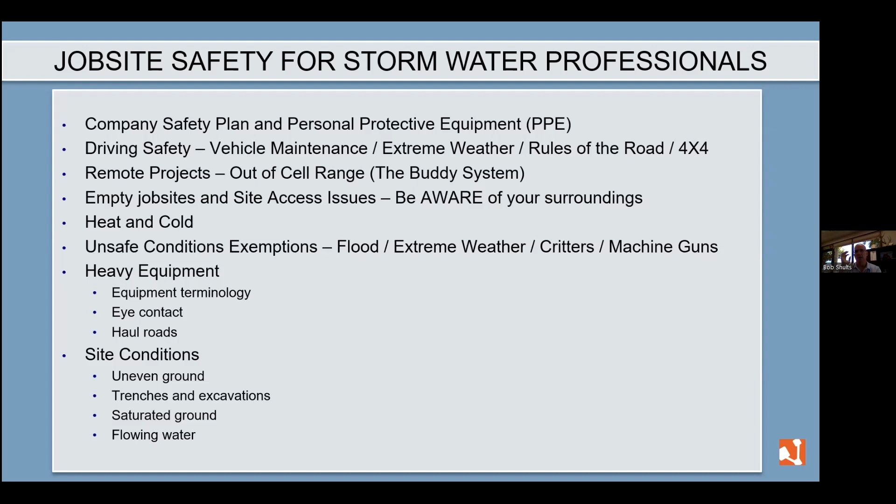So, well, I guess we could start here. We'll start here with the injury and illness prevention program. So everybody should have one of these at every project, or every company should have an IIPP. Here's an example of one, or a table of contents for one, but it's something that you should have and that you should emphasize.

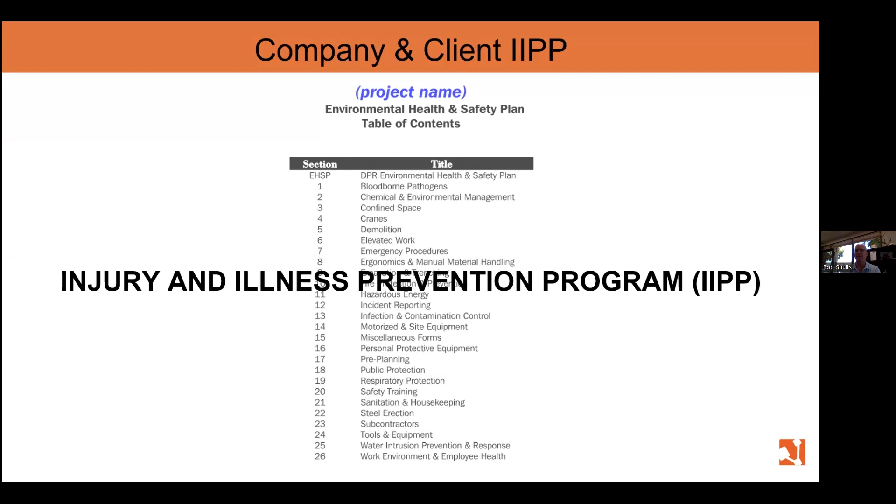So the point of having this and starting with this and starting about safety is that everyone should enjoy an injury-free environment, and everyone should live it. Live it being, I'll talk about this multiple times today, but it needs to be a part of the culture. Culture of safety needs to be something that's emphasized. You know, it's really easy to just kind of go about your business, sit in front of your desk, go out and drive to and from work and do things.

But we really want to make sure at my company, and I hope everyone would, that culture of an injury-free environment is something that we need to emphasize and live, so that people don't make risky decisions. People understand, they have that little voice in the back of their head, which should be my voice at my company saying, should I jump this trench right now? No. Bob would not be happy if he saw me jumping this trench, trying to be an athlete out here on the job site. Those are the kind of things we want.

It needs to be a culture and an understanding, and it needs to come from on high. It should not just be at a middle manager level where they worry about it and the bosses don't care. If it comes from and is clearly a priority of the higher ups, and then it goes down to everyone, it's very clear. That's the reason why we start every meeting with safety at Verux, because we want to understand that's first priority. First priority is everyone going home safe to their families at night. Okay, so it's the responsibility of managers and owners to build that culture of safety. So culture, injury-free environment, live it.

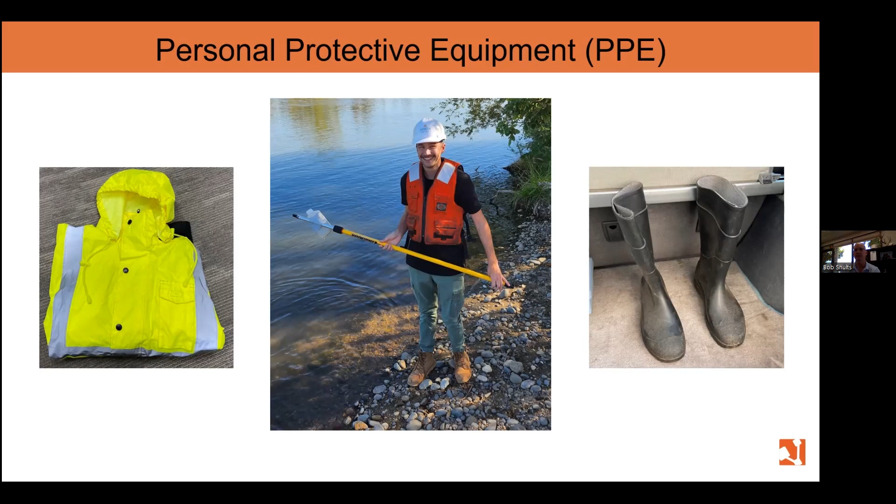All right, driving safety. As a stormwater professional, you are definitely going to put the miles in. You're going to have to drive around to those job sites, from job site to job site. So one of the highest risk things you're doing is being in that car all day long, putting 15, 20, 30,000 miles a year on your vehicle. That is a shuttle to where you're going, and it needs to be maintained and well taken care of.

So we have protocols for our people to make sure they're doing these things and they understand. A new employee may have been driving since they were 16 years old, but they had mom and dad taking care of their car, or they still don't know all about maintenance. It's very important when you're putting a lot of miles on your vehicle that you're properly maintaining it from a safety standpoint, but also for the usage and the long-term health of your car, right?

Every 6 months, chassis lubrication and wiper blades. Okay, probably more than every 6 months, definitely going into the wintertime with your wiper blades. Every 9 months, same checklist as every 3 months. Every 12 months, brakes, cabin air filter, coolant, steering, and suspension and wheel alignment.

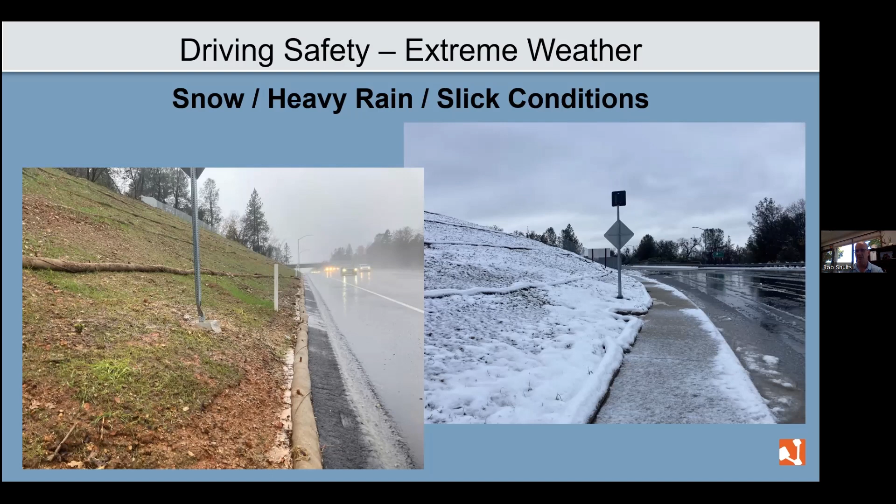Okay, speeding, passing, road rage. From a safety standpoint, speeding is not okay. Okay, you're in a hurry because you got a bunch of jobs you need to go to, but you need to drive the speed limit, follow the traffic laws. Passing needs to be done in a safe condition per the traffic laws. Road rage is not worth it.

Someone driving like a not super smart person in front of you, doing something dumb, cutting you off, those kind of things. Find some Zen, take a deep breath. It's not worth it. Don't road rage. Slow down, get away from the crazy person. And if you drive around enough, you see crazy people on the roads. Give yourself extra room when someone's weaving in and out of traffic and driving way over the speed limit. Get away from them. They're headed to a disaster. You don't want to be caught up in the crossfire. Road rage is not worth it. Don't do it.

Okay. We have a quick question, clarification. How would you suggest documentation? Photos? You're talking about the snowy conditions. Yes. And we're going to talk more about documenting unsafe conditions. We're going to get into other unsafe conditions, but from the road, yes, we always push for having a photo documentation to document an unsafe condition that you feel is exempting you from having to do your inspection.

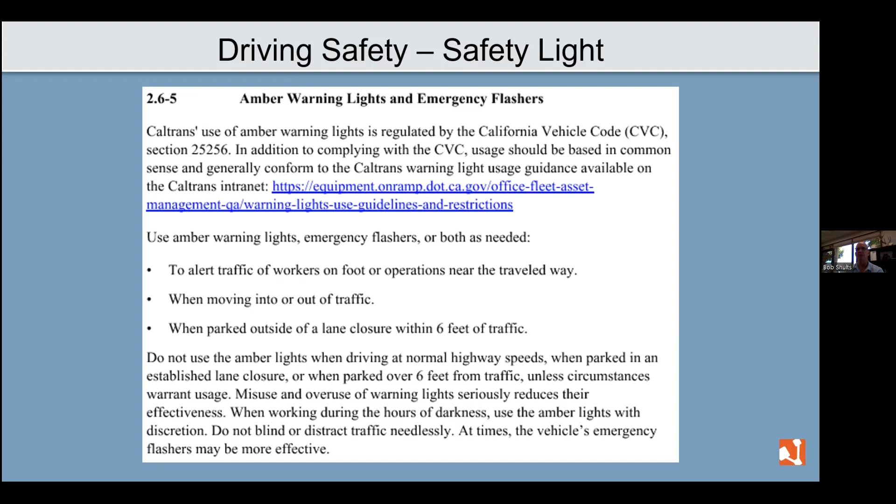So traffic control is something we're dealing with frequently on project sites. Understanding the current traffic control and communicating with your contractor client each week prior to accessing the site is really important. Having a plan for winter access during rain events, communicating the plan to stakeholders, and understanding safety concerns.

So I need to get in and out here. It may be that you can drive your car in and out of the traffic control and be able to get to the areas you need to get to. Or it may be a situation where the only safe way is to park someplace offsite and then walk the job as well.

Part of that is, on jobs you're there once a week potentially, sometimes more often during rain events. You may want to establish communication with a job that has a lot of in and out traffic, and requirements of getting in and out of live traffic. Establish communication with your contractor client about whether you need to come meet with them and have them drive you through the job in order to get through it safely.

I'm coming tomorrow - am I doing the same thing, or has traffic switched? Is there something I need to know about getting to different portions of the job site? Communication is a really important part of this. So just things to think about.

And understanding that your job's going to change - you're not there every single day. So it's going to change, and you may go out there and be unable to reach and get to all portions of the job.

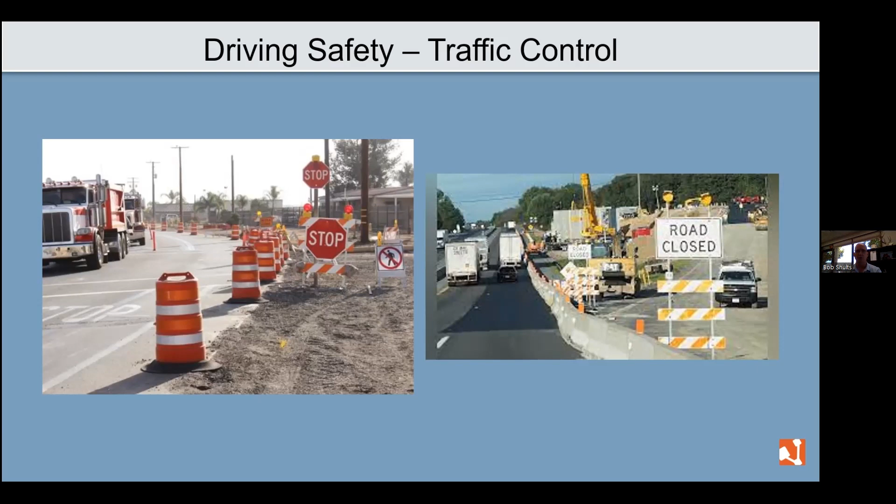As you get into winterization planning and winter planning, it becomes even more critical, because this job is going gangbusters right now, but come December, after it's rained for 3 straight weeks, it may be a ghost town, and you have to have an ability and a plan for how you're going to get around that job site. Working with your contractor client about that communication is going to be necessary.

So these are the kind of things you want to discuss and make sure you have that culture so people are comfortable discussing these kind of situations with you, and what's happening on these jobs, and then talking to your client as well.

Jobs can be empty in the wintertime because it's been raining. The contractor can't get out there, and we may not be able to get out there either. So it becomes a conversation with your client going, we can't get to the job. It's 2.5 miles on a gravel road. We're not going to walk that. So we have to figure out a way to get access to be able to do our inspections.

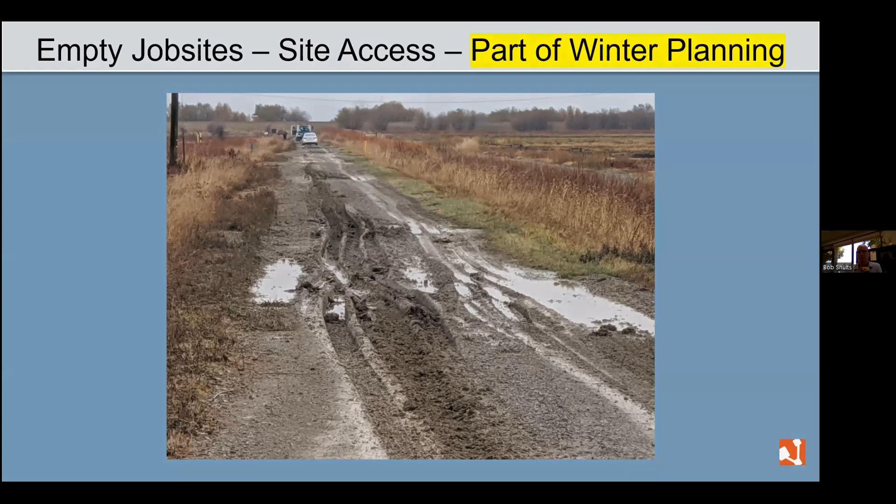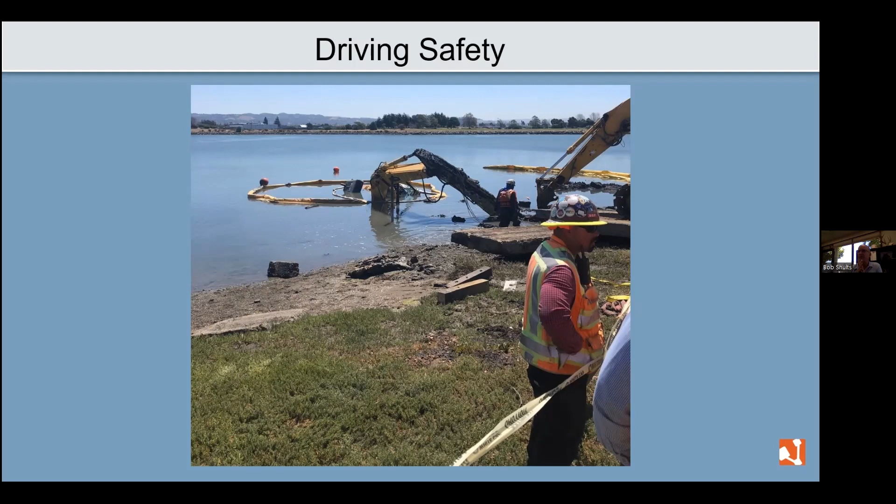This is just a funny picture. Even a contractor with very heavy duty equipment can still have things go wrong when it comes to water. This is a job with tidal influence. They had an excavator out there working, it got stuck, and the tide started coming up. Even with extra equipment there, they could not get it unstuck. Now they're spending time putting turbidity curtains around it because they have to wait for the tide to go down before they can try to pull the vehicle out the rest of the way—a sideways excavator.

Remote projects, being out of cell range, and the buddy system—it's something to think about. It's a policy that we have. It is possible to have projects that are very remote or don't have good cell service, so it's something everyone should be aware of and thinking about.

If you're going out to a project, this is a project we had at Hellhole Dam. There's not really much reason to go there, I guess you can fish, but anyway it's past Forest Hill, which is pretty deep above Auburn. It's a full 2 hours and 10 minutes of driving past Forest Hill, and from Forest Hill you have no cell service. So you've got 2 hours and 10 minutes one way to get to this project before you turn around, so you're 4 hours of driving on gravel roads just to get to the project.

And with no cell range. So when we're sending someone up there, we're obviously aware of that person being there, and we have a buddy system where we know the person's going, we know when they're going, and we know when they should be getting back. They left first thing in the morning, by 1 or 2 o'clock in the afternoon they should be back in cell range. If it's late in the day and we haven't heard anything, we're ready to send out the search party. So when you're in a situation like that, we need to make sure someone is aware of where it is you're going, that is going to be out of cell range, so that we can send help.

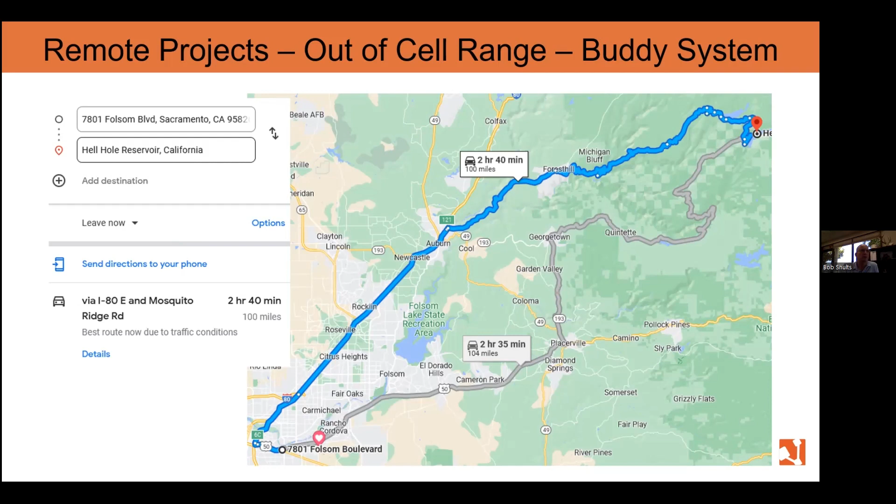Okay, empty job sites, being aware. This is a unique situation for stormwater professionals that should be talked about. Last winter, from December to the end of January, it rained every single day. It was a unique situation to have that much rain, and it was also a unique situation that pretty much all of our jobs were ghost towns during that window.

Unless they were vertical construction and working inside, any project that wasn't in vertical construction space had no one there for a month and a half, and we were going there almost every day. You're out there by yourself doing inspections on your own, so you have to be acutely aware of safety situations because you are by yourself. There is no, if the contractor's there and everyone's running around doing things, you've got all kinds of people to talk to and get help from. You turn an ankle, you do something wrong, you've got ways to deal with it.

You always have your cell phone, want to make sure you're in range if at all possible and have a way of getting a hold of someone. But you also don't want to put yourself in an unsafe situation no matter what happens. Be more cognizant and aware of unsafe situations when you're by yourself. Look at the job: slick, uneven ground, near a waterway, working near a waterway, working on steep slopes—those kinds of things. Be acutely aware of those situations.

Also be aware of things that can happen on job sites, or sketchy individuals on the job sites. You don't have to be a hero, you need to do your inspection. If there's someone on the job site that's clearly not a member of the construction staff and you don't know who they are, you don't need to go approach them or run them off. You've got a phone, use it. Call a contractor, find out if someone's supposed to be there or not. Be near your vehicle, go to a safe place to make that call, make sure it's okay.

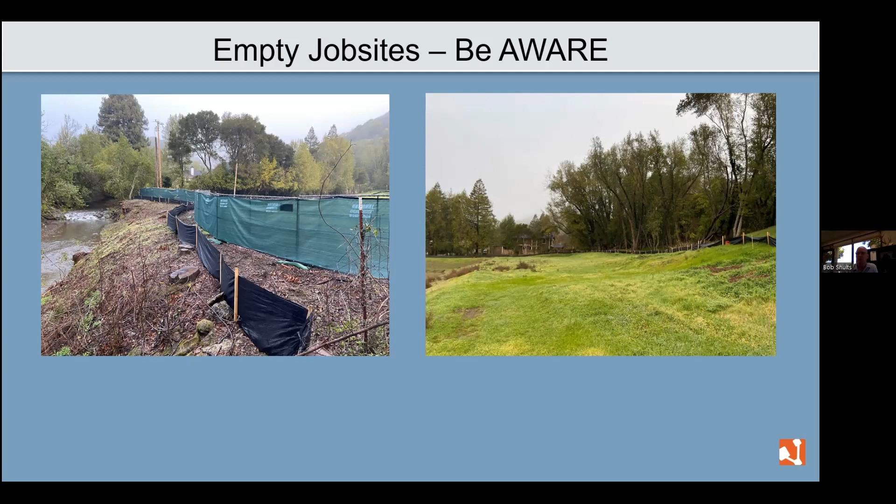The one thing we do now have with a new permit is the ability to have inactive status, which is a nice thing. You get into a job site like this one, or either of these two job sites, and there's no work going on. You could potentially do a change of information with a new permit and go to inactive status. So it's something to think about, because then you could cut back to once per month inspections, no sampling, and only pre-QPE that can be done by a delegate or a QSP. So new things with a new permit could help these kinds of projects, where they're truly not working, in order to reduce the amount of inspections. Again, but be aware, don't be a hero.

Heat and cold, spring and early summer, this is a big deal if you're not acclimated to heat. Obviously cold is a situation too, depending on where you're working, being in the cold, making sure you have waterproof clothes, you're not getting super wet, and getting yourself in a position where you're putting yourself at risk for hypothermia, those kinds of things.

As much as anything else, there's an acclimatization that is required, especially with heat. This was last September, showing 114-degree days. Obviously that's a concern, but in September it's less of a concern because your body has acclimated. Acclimatization means temporary adaptation of the body to work in heat that occurs gradually when a person is exposed to it. Acclimatization peaks in most people within 4 to 14 days of regular work of at least 2 hours per day in the heat.

I know, I feel it. It's been nice and cool all spring, then the first day it hits 95 degrees. If you're out in that sun, you rapidly feel like you really take the effects of the heat much worse. Where in August, if it's 95 degrees, you're like, oh, it's a beautiful day today. It doesn't even bother you, because your body does acclimate to that heat. So be very aware in spring and early summer, when we get those first hot days, that you're hydrating and keeping track of how you're feeling. If you're starting to feel woozy or uncomfortable, get back to the car, get in the air conditioning, get some water, make sure you're feeling well, call it in and explain it, and make sure you're doing okay. It's a big deal in California - you get these 100-degree days, and the first 100-degree days in particular can be gnarly.

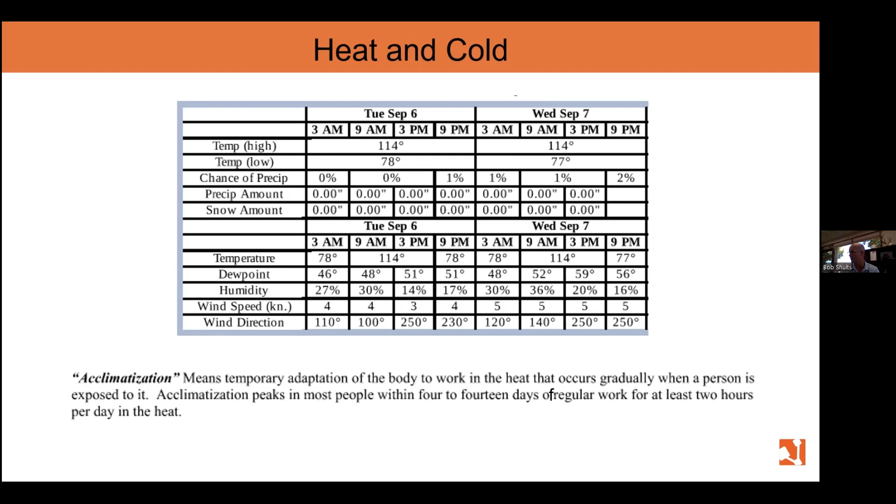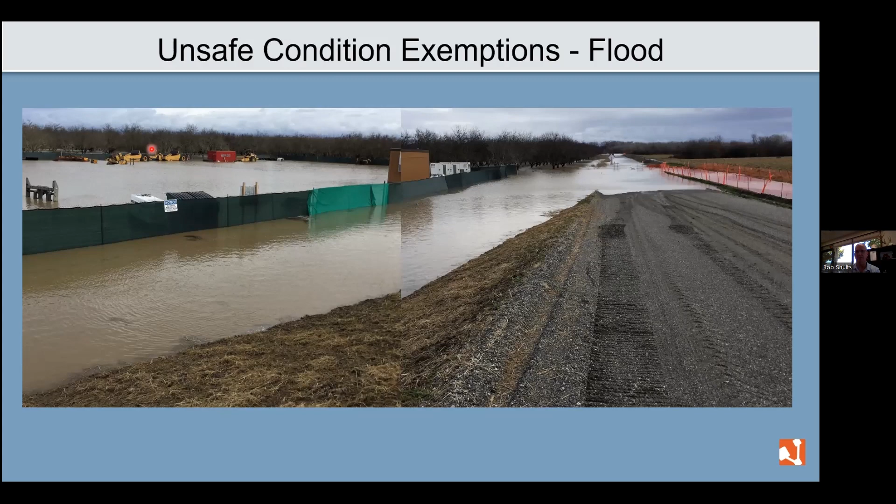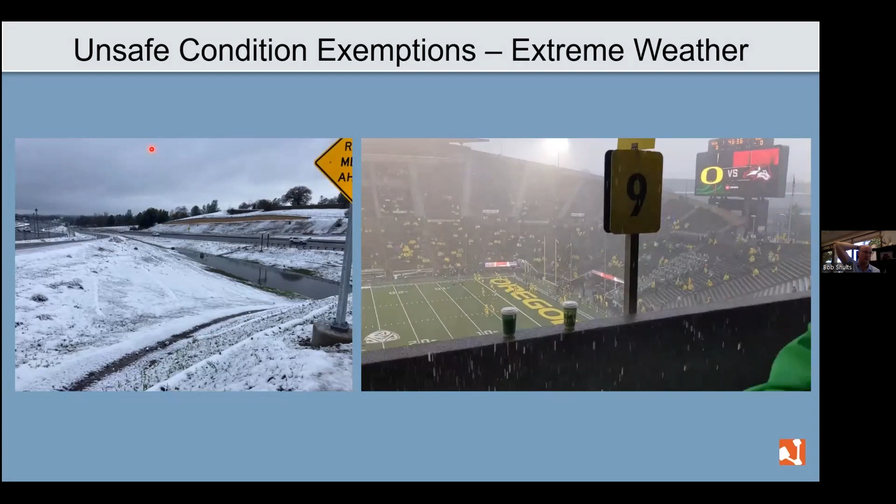Unsafe conditions, extreme weather. We've got a snowy condition here on the left. I don't take a lot of videos of when it's raining really hard - this is when I was watching my son play football at the University of Oregon. There was a legitimate, super extreme rainstorm we were standing in at that time. But unsafe conditions - rain in and of itself is not an unsafe condition, but extreme weather where there's flooding, or conditions where it's snowing and too slick for you to get there, you can potentially document that you can't get down here because it's unsafe to walk down the slope due to snow and ice. If there are chain controls and you can't get to the job site, then you turn around after taking pictures.

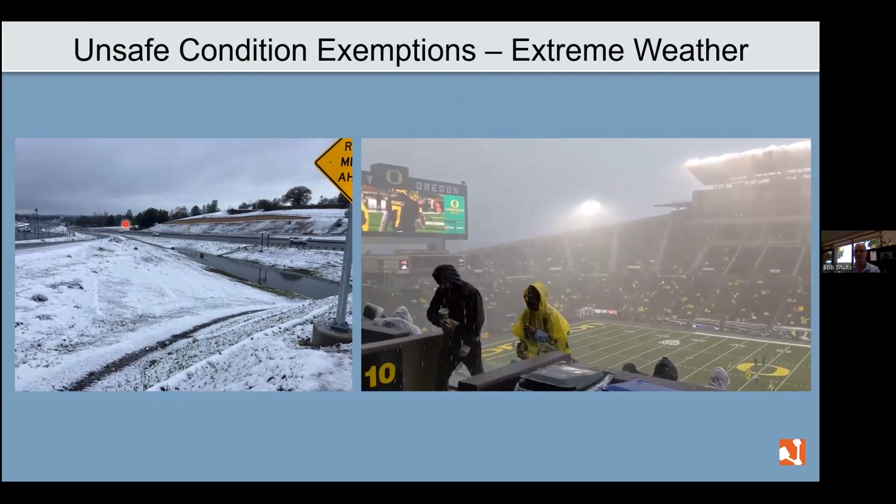And more common would be wasps or bees or those kind of things. You can have a swarm of bees, you can have a wasp nest that falls and keeps you away from being able to sample in a location you're used to being able to sample that's on your water pollution control drawings. Document it. Document why and include that with your inspection report. Okay.

Also, something that was brought up last year, as far as unsafe conditions or something that you can bring up to your client: in a 401 sampling environment, as an example, you're supposed to go 300 feet downstream. But it is located in a berry patch, basically, where you can't get through, or it's on private property. So you're having to go through someone's private property to do it. That's something you're going to document.

You're going to explain to your client, and maybe the client can go in there and cut an access through the berries for you. Maybe the client can help you talk to the private property owner and allow you to go do the 300 foot downstream. Or if it can't, then you're going to document why you can't, and you're going to talk to the water board about why you're actually sampling at 500 feet downstream because that's your only good access. And you're documenting all of that. Just be transparent. These things happen.

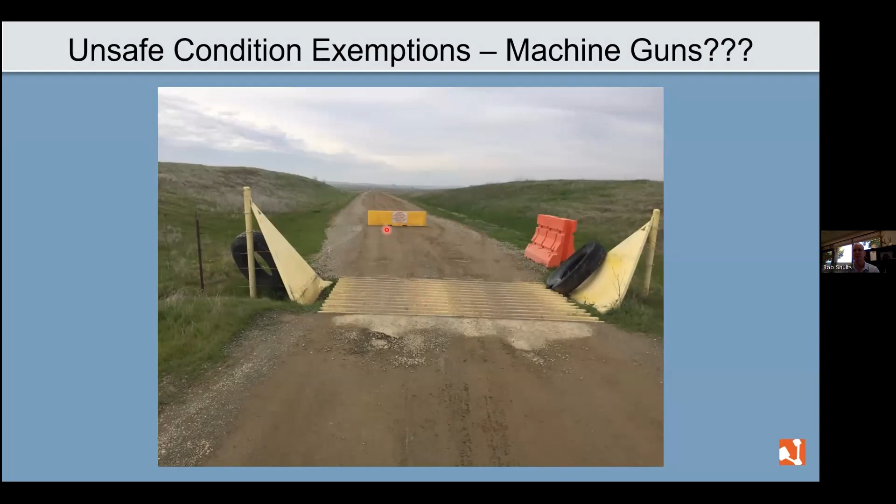Unsafe conditions. This is my machine guns option. So we have a job at Beale Air Force Base. The project is out here off the horizon. This is our one access point. We get there and there's a yellow barricade across the road. The barricade says, danger, machine gun firing in progress, do not enter. We took a picture. This is our picture from our exemption that we attached to the inspection report that said we did not do sampling that day because we could not get there. Kind of makes sense.

Now, the one exception to the rule, it's not really necessarily a full exception, but at Beale Air Force Base, the same technician was going out there and there was some sort of terrorist threat that happened. So the entire base was closed. I beat it into their heads, not literally, because that would be unsafe. But I talked to my technicians in detail about safety, and about if there's an extreme safety condition like this, or a condition that keeps you from being able to do it, you need to make sure you document and take pictures.

We were going to the job. The main gate at Beale Air Force Base is closed. It says there's a terrorist threat, we're not allowing any visitors. The technician got out of the car and took a picture of the closed gate. During a terrorist threat, taking a picture of a guard shack at an Air Force base is not a great call. He got cuffed.

I got a call and we had to go get him out of Beale Air Force Base jail and explain why he was taking the picture, that he wasn't actually trying to look through the security of Beale Air Force Base. But they literally pulled guns on him for taking a picture of their guard shack. So that's one case where it wasn't as good a thing. You could probably pull something off the internet to say that Beale Air Force Base was closed, and that would be enough.

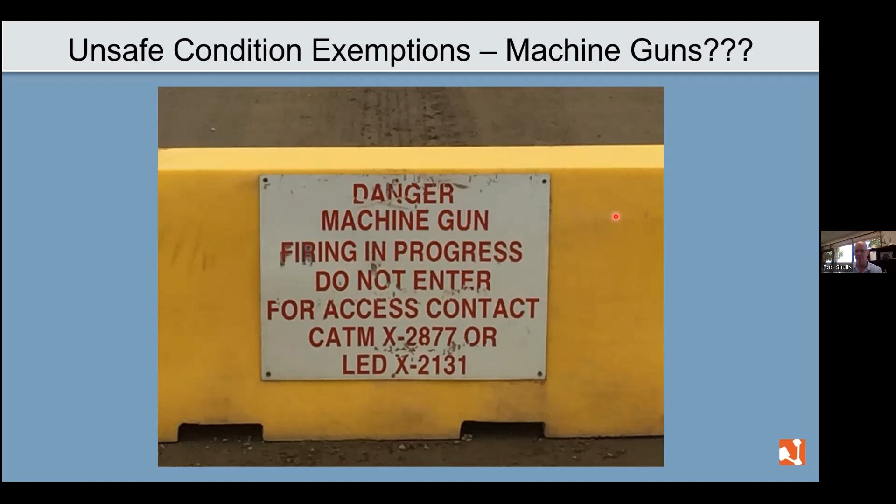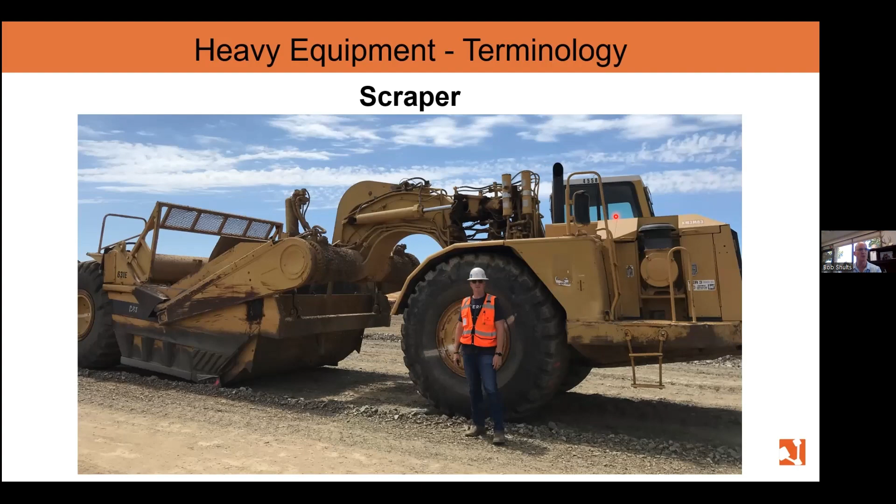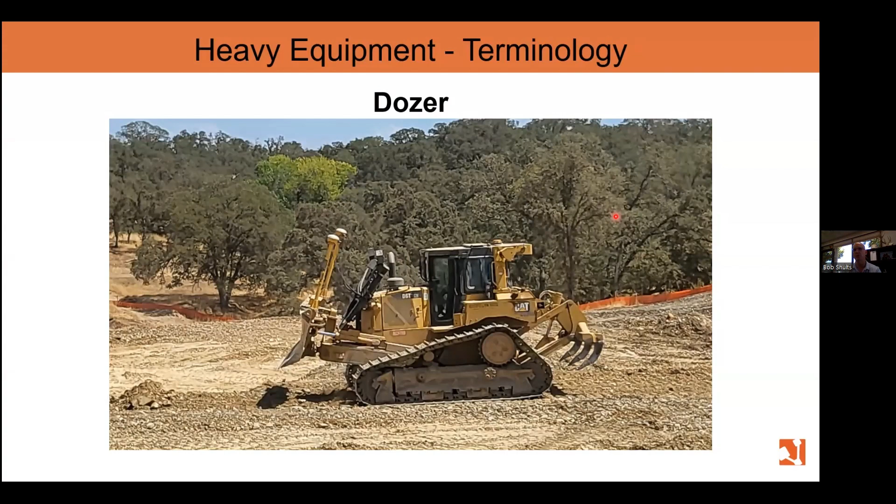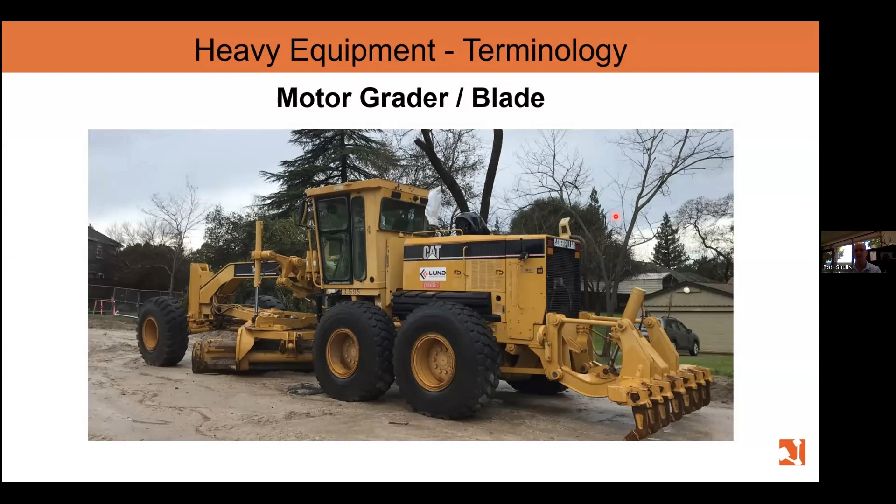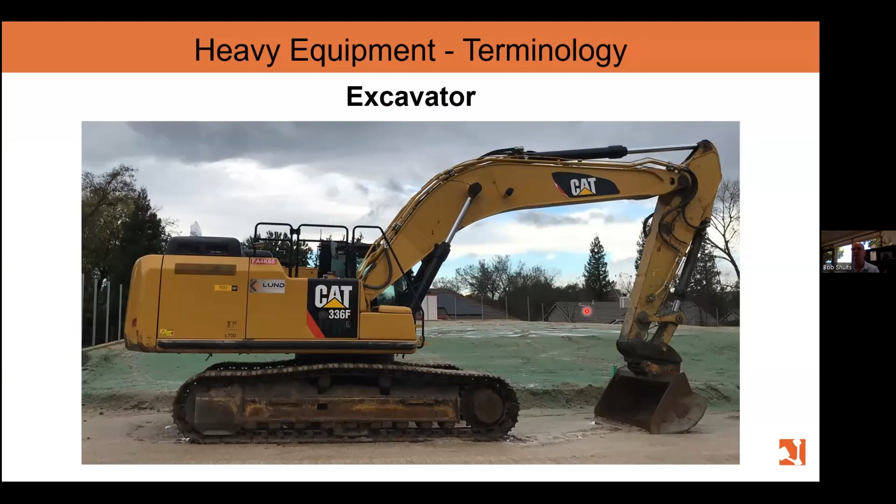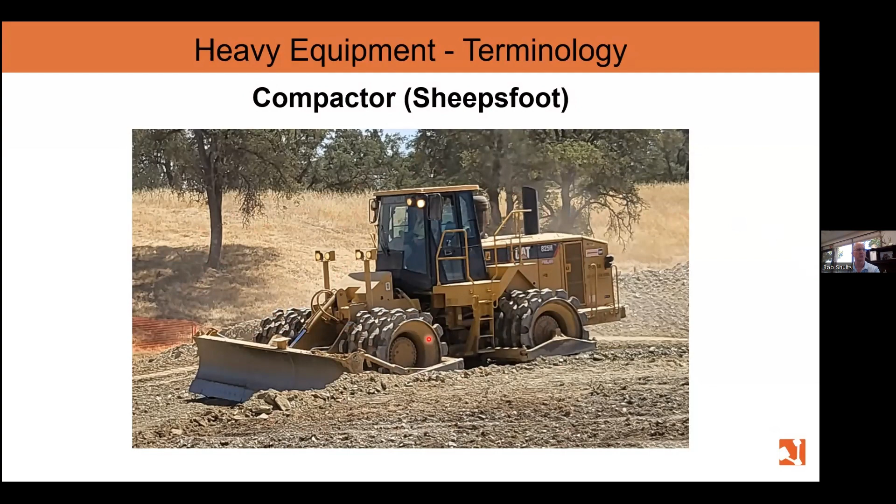This is called a compactor. This is called a Sheepsfoot compactor. It's an 825, and they also make them an 815 and smaller and bigger, I think, but 815, 825s are the standards. So a sheep's foot compactor, sheep's foot refers to these knobby wheels, okay? And then there are vibratory compactors. There are other types of compactors that their job is to consolidate the dirt underneath the piece of equipment and compact it properly.

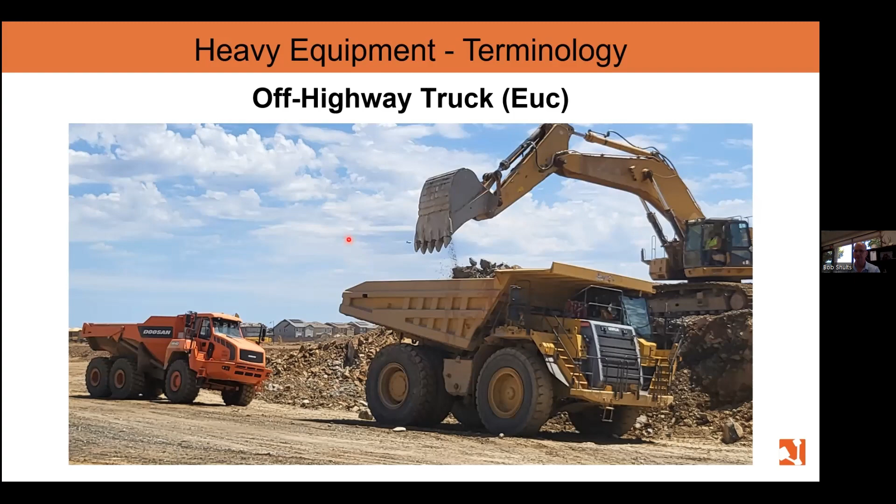Also, a very large excavator with a very large stick. Again, blind spot on the side of the excavator. And this is a smaller Euc over here. They are off-highway trucks. They're called Eucs because the original ones were made by a company called Euclid. A backhoe. A backhoe is one that has a front-end loader attachment and it has a back attachment, excavator attachment. That's why it's called a backhoe.

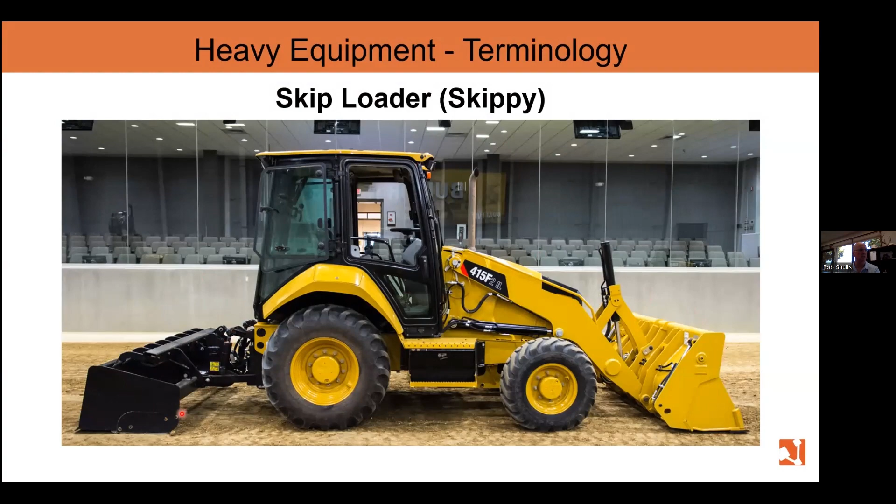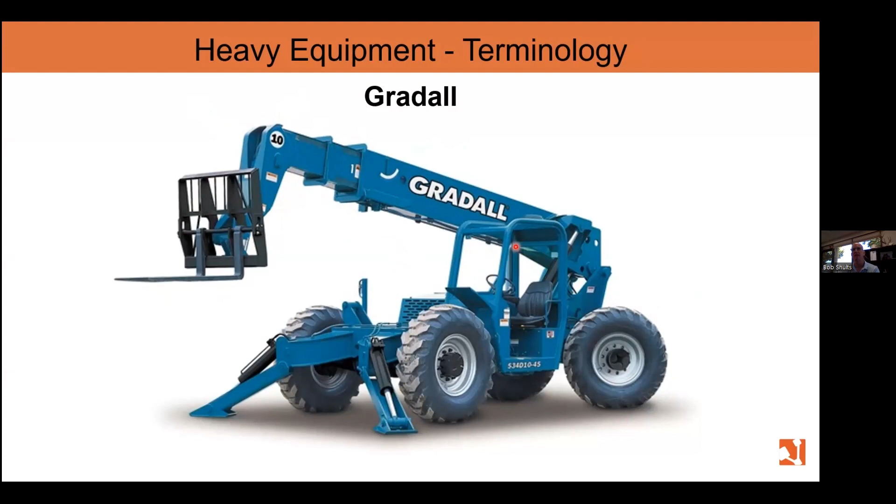A skip loader or skippy. Again, loader attachment on the front. Often a Gannon box or a box on the back to be able to do fine grading. That's a skip loader. Gradall. These are used on all kinds of vertical construction projects to move material up in high areas and around areas of the job site. They have articulating wheels so they can get in very tight corners and spaces. They have the forklift feature that can reach all the way up to second and third floors. Again, a big issue with visibility in these vehicles because of the stick. The Gradall.

To stop them is not something they do on a dime, especially with the amount of momentum and physics behind all that weight going in the vehicle as it goes by. So in your personal vehicle or when you're walking, you do not want to get in this thing's way. You do not want to require this guy to slow down. It doesn't stop on a dime, and your little passenger vehicle would be a little bump to this thing.

Understanding if there are haul roads and big heavy dirt moving operations like this, you need to be talking and communicating with your client. Can I go across the job site? Is it okay to cross the haul roads at 90 degrees? Do you have safety protocols? Do you want to take me on a tour the first time to make sure I'm not driving along in my Accord going opposite this and this guy's having to slam on the brakes? Contractors get very upset about that.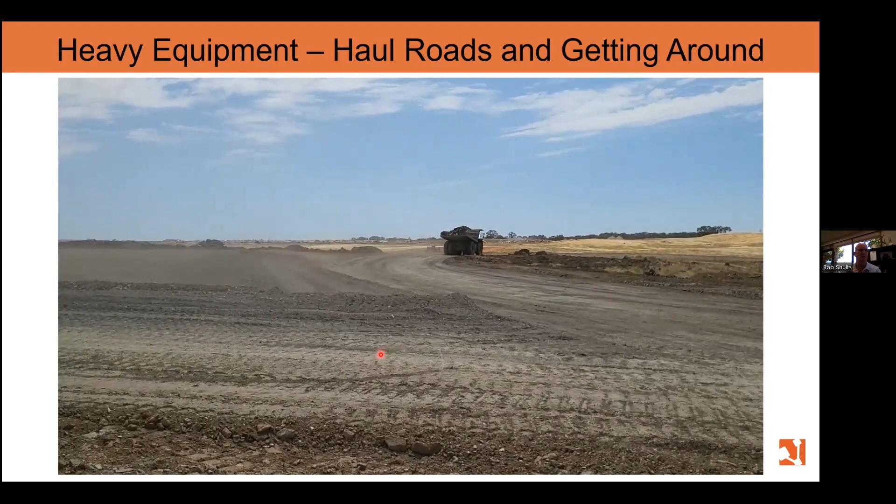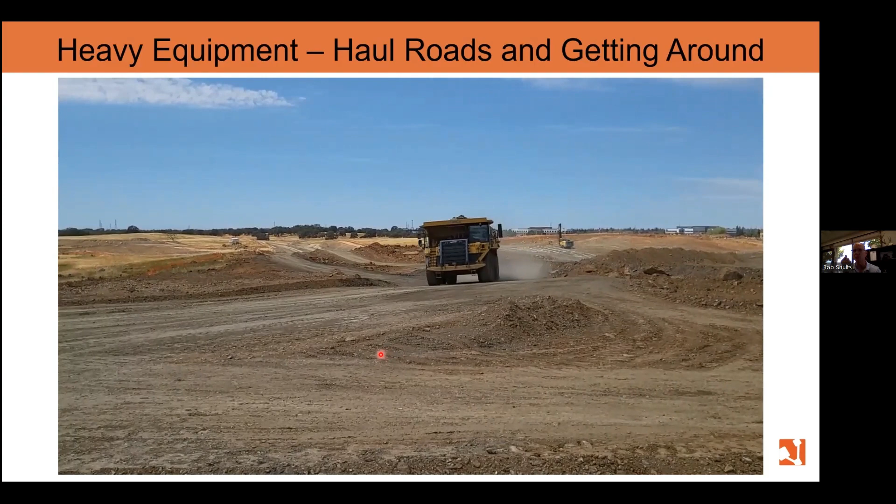One, from a safety standpoint, obviously, because there's huge safety concerns, but also production and cost. That's an expensive piece of equipment. Production is very important, getting the dirt from point A to point B and getting back and getting another load. You stop that piece of equipment, slow that piece of equipment down, you're hurting their production, you're costing them money. So don't be that guy or gal.

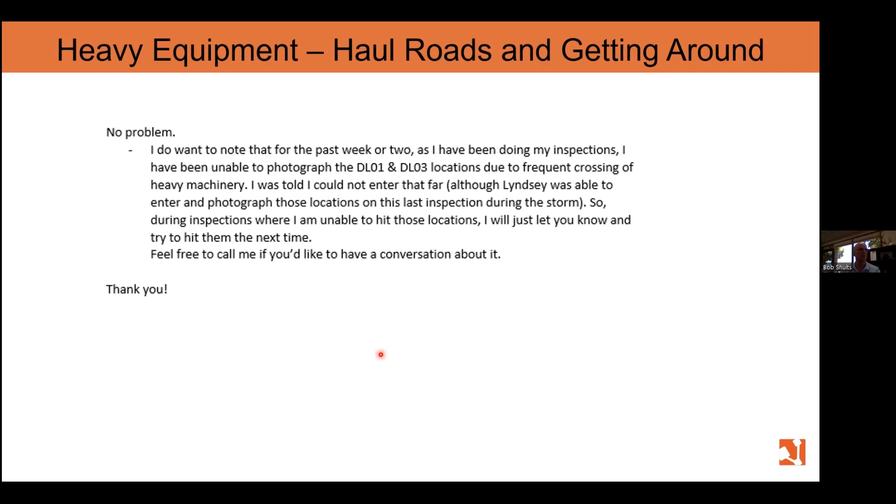We said, no problem. I do want to note that for the past week or two, during my inspections, I have been unable to photograph DL01 or DL03 locations due to frequent crossing of heavy machinery. I was told I could not enter that far, although one of our technicians was able to enter and photograph those locations at the last inspection. So during inspections, when I'm unable to hit these locations, I will let you know and try to hit them the next time. Feel free to call me. And the response was, not a problem, Ronnie. Safety is more important than photos.

So this is a good interaction, a conversation that happened between us and a client, where there was a haul road. We had talked to them about accessing an area of the site, and it was the middle of summer. We couldn't get there safely, and so we had an exemption for not going in there. Now it can't be a consistent thing where you can't see your whole job site; you need to be able to see it. So they have to accommodate you, but this is a good interaction with safety in mind, explaining why we were and weren't getting to all the areas of the job site.

Okay. So here we are. Eye contact and hand signals. When you're around pieces of equipment, we talked about this, the sight lines and the blind spots of these things. When you're walking or driving or doing anything around a piece of equipment, you have to make eye contact. Number one rule: eye contact must be made. Okay, it must be made.

These operators are used to people needing to make eye contact and being seen. You stop until you can get his attention. You point, you make hand signals to where you need to go. You see his hand signal waving you on, and then you go because you know you're safe. Here's an example of it in real time. We're waiting. The excavator is moving, he's doing his thing.

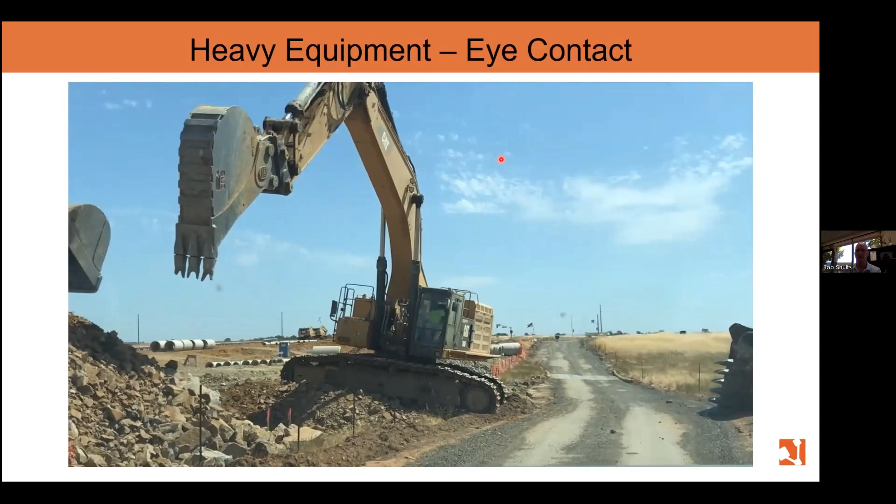He sees us, maybe a little hard for you to see. He focuses on us, he waves us on, and then we drive by. That is the proper technique for dealing with that, okay?

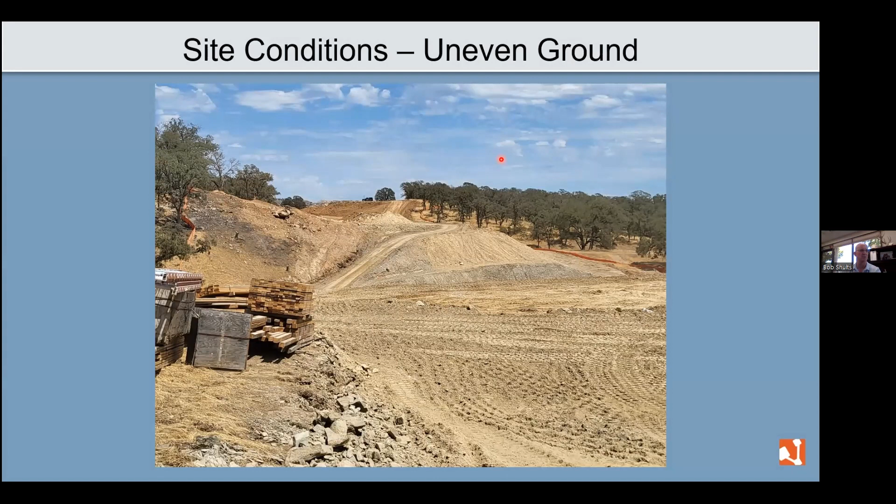Other site conditions: uneven ground. You're walking on job sites, you need to have eyes up and eyes down. Eyes up for equipment and everything else, but eyes down as well. You don't want to turn an ankle, hurt a knee, do that kind of thing. So you need to be eyes up and eyes down.

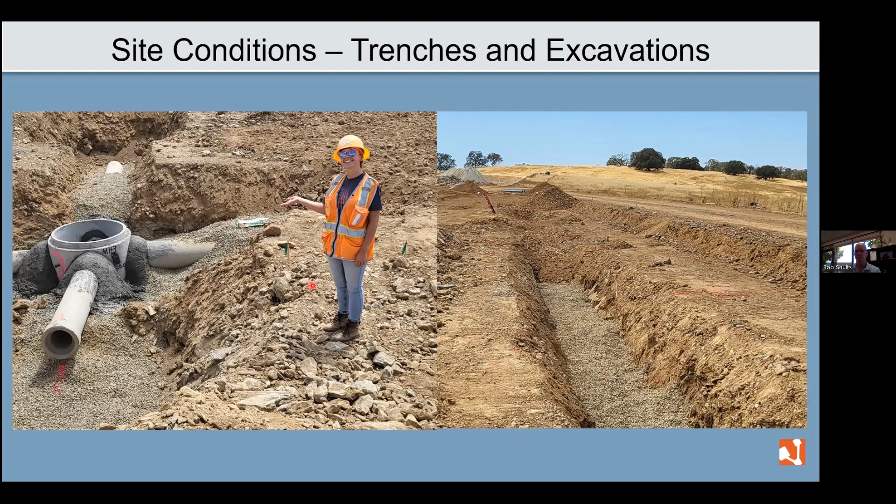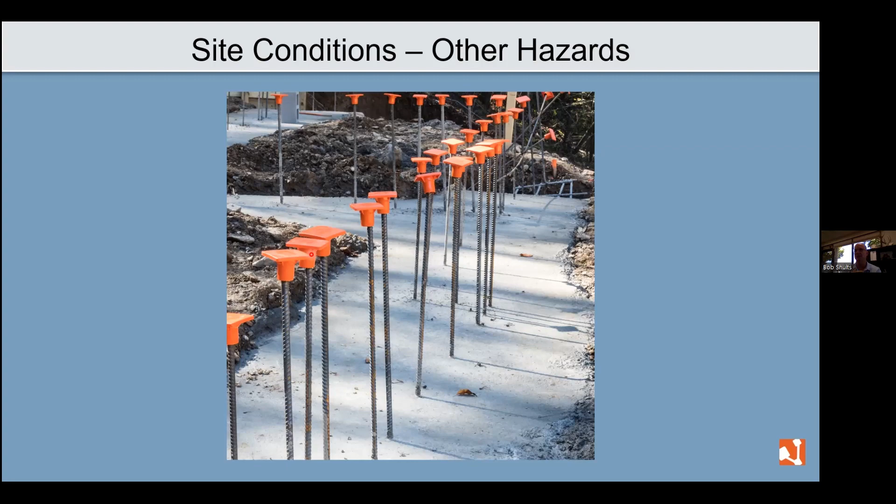Being around rebar and formwork and stuff like that, there's nails. You need to be eyes up and eyes down and looking where you're going. You don't want to step on nails. That's the reason why we wear sturdy work boots, but look out for that kind of thing.

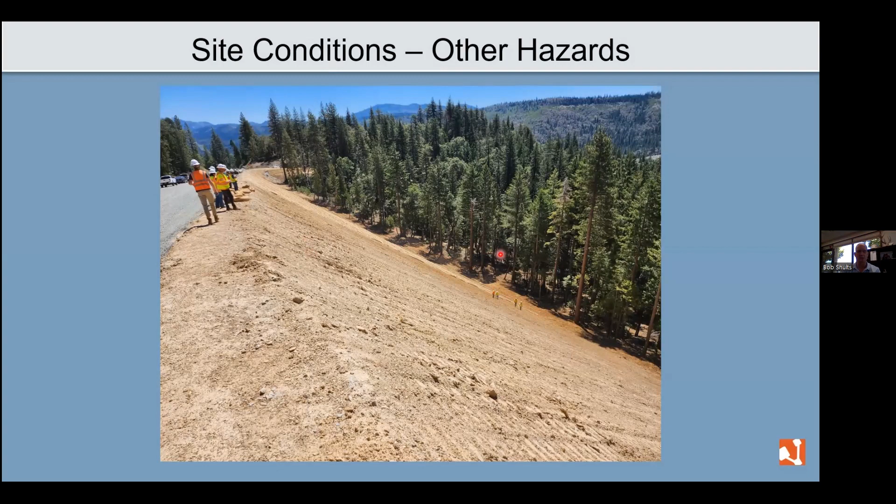Other issues that could come up: this is a very steep slope on a project we're working on. You can see the people way down at the bottom there. Sometimes you're working on steep slopes. You may have to have walking sticks. You may have to have other ways of getting down a slope, or find a different, safe way to get to the bottom of the slope, not just diving off the edge. Obviously, eyes up and eyes down.

The unfortunate part of what we're going through is that there can be hypodermic needles. There can be other things that are sharps or other issues you're concerned about. You don't need to handle these. You just need to make sure that you're not affected by them.

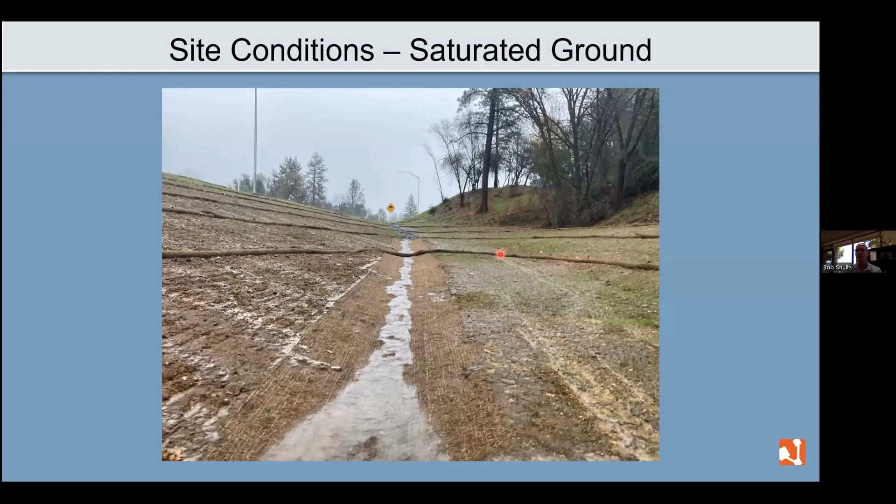This is something John brought up last year. When you're walking on jute netting, you need to be careful. It may look like it's stable. A lot of times jute netting like this can have some erosion underneath it. You may be thinking you're stepping on even ground and there's a 6-inch erosion underneath that you're falling into. So be very careful about saturated conditions, slippery conditions, those kind of things.